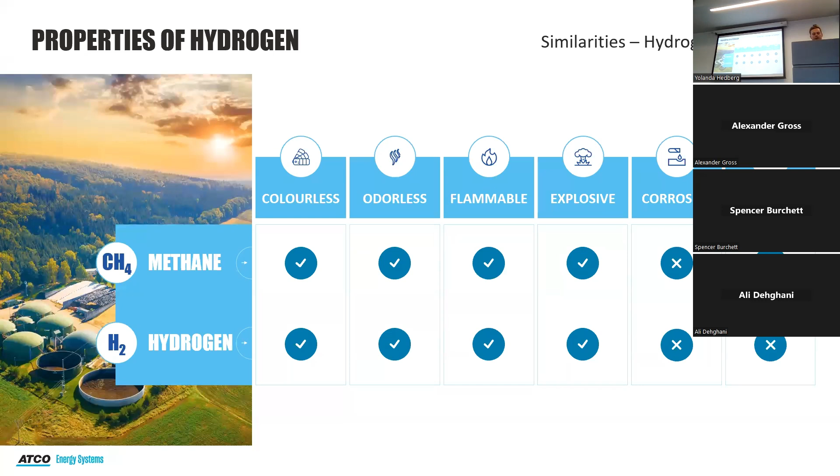So what is hydrogen? Generally speaking, I just wanted to show some comparisons between the gas we use today and hydrogen. Methane makes up about 85 to 95% of natural gas, which is what's predominantly used to heat homes in Canada. Similar to methane, hydrogen is colorless, odorless, flammable. It can be explosive, and it's non-corrosive and non-toxic. So similar in a lot of ways there.

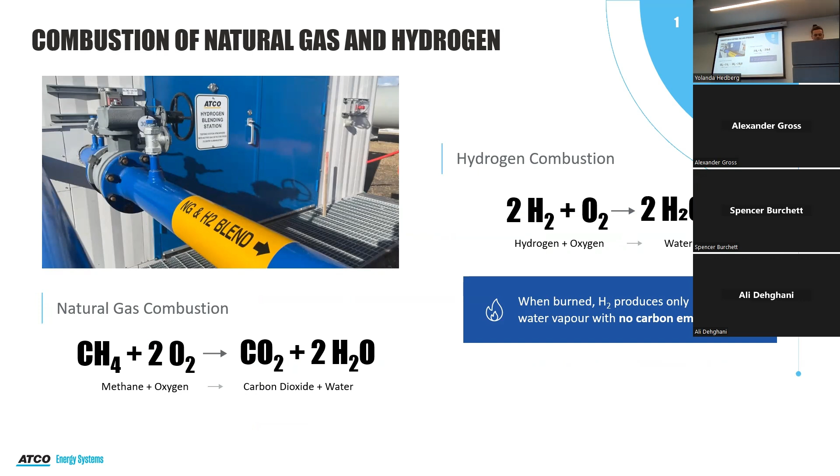In terms of combustion, this won't be anything new to you guys, but the combustion process - whenever you have a hydrocarbon, you end up with CO2 and some water vapor out the other side, along with the energy you're looking for. The benefit of hydrogen is you don't have that carbon mixed in there, so there's no CO2 as a byproduct. We're looking at carbon emissions - that's obviously the main factor when we're looking at doing hydrogen.

So water is also a big greenhouse gas, right? If the hydrogen is made from water, then that doesn't matter because it's circling. But if it's made from fossil fuels, it does matter. I guess so. I'm not sure what - it wouldn't be, I guess, any different than burning natural gas normally, right? You're still generating water. Yeah, you're still generating water. So I'm not certain to what extent, but it would be the same. You might get a little bit of larger volume because you have to burn more volume of hydrogen, but again, if you're making it from methane...

Digging into the more quantitative properties of hydrogen and comparing it to natural gas. From a density perspective, it is a lot lighter, which is a benefit in a lot of ways when we're talking about safety. It's more buoyant and diffuses a lot faster, so if you have a leak, you're less likely to have that gas build up in an area where it could be flammable.

On the other side, the flammability limits for hydrogen are a lot broader than methane. For methane, you're looking at about 5 to 15% in air where you can actually ignite a mixture; outside of that, it's either too lean or too rich. Hydrogen is a lot broader, so between 4 and 75% in air is ignitable, and your ignition energy is often a lot lower. These ignition energies shown are stoichiometric combinations, but you're about 10 times lower. For natural gas, your stoichiometric mixture is around 8 to 10%, which is a lot easier to form when you have a leak. For hydrogen, it's about 30% in air, which for most residential uses is very difficult to form in your home given the average leak tightness.

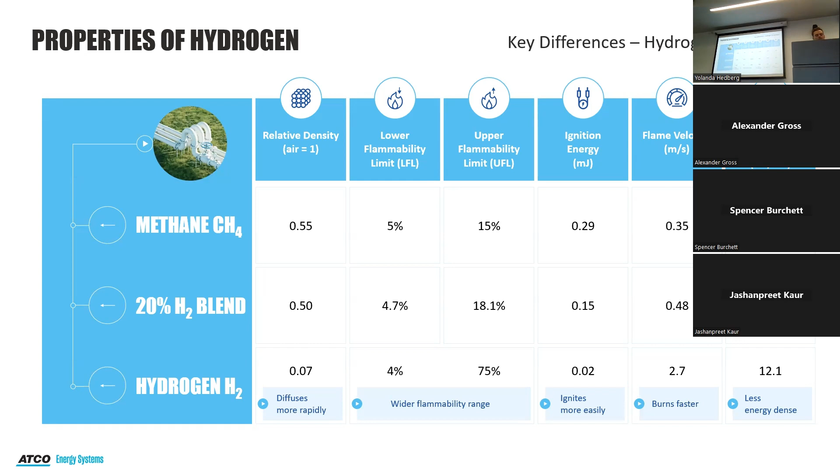Kind of like he was asking, will hydrogen be safe? We do have to consider all those different properties, but we have to treat it with respect similar to natural gas. We switched over from town gas to natural gas a number of decades ago and made adjustments to our systems to accommodate that. Similarly, we just have to understand how hydrogen reacts in our homes and what safety precautions we need to take.

One highlight is that hydrogen could be a safer gas: about 95% of the risk to your personal safety within your home, if you have a natural gas fired appliance, comes from carbon monoxide poisoning. So 95% of your chance of being injured or killed comes from CO. With hydrogen, obviously you don't have that carbon, so you can't have carbon monoxide being formed. There are some studies that show it could be safer in residential applications, given the correct safety protocols.

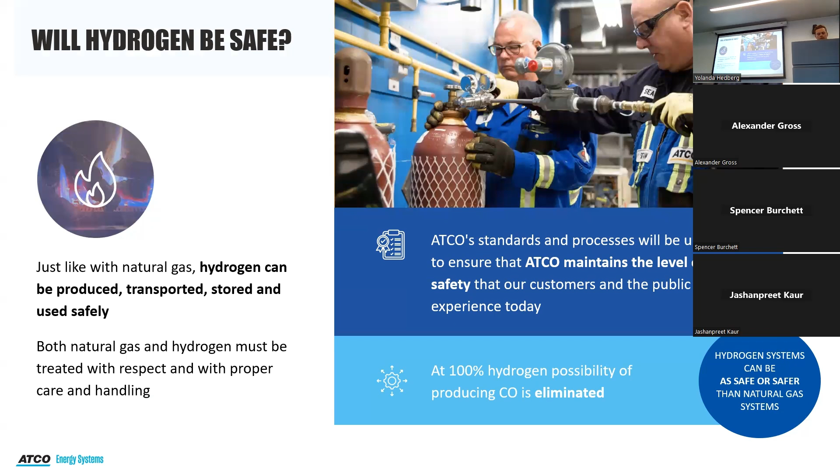So when you breathe pure hydrogen, there's nothing that happens? Yeah, there wouldn't be any toxic effect. I guess the one benefit is, like helium, it would rise out of your lungs very quickly. But obviously you probably don't want to breathe it.

It is fairly easy to ignite. You'd hear it in your voice, right? Yeah, probably. I wouldn't recommend using it as a replacement, again because it can ignite, but in terms of toxicity it's not a fun part of it.

So just talking about hydrogen production, there's three main types you might have heard about: blue hydrogen, gray hydrogen, green hydrogen. I'll talk about those, they're the main three. There's also a whole spectrum - turquoise, clear, gold - these are all different technologies. But I'll focus on the main three and then talk about why those colors are being phased out.

Blue and gray rely on similar technologies, either steam methane reforming or autothermal reforming, which operate on fairly similar principles. They take steam and natural gas, smash them together, which breaks apart bonds forming carbon dioxide and hydrogen. They insert more steam, which makes more hydrogen and carbon dioxide.

For blue hydrogen, the main principle is that once you've extracted the hydrogen from the CO2-hydrogen mixture, you're capturing that CO2 and either utilizing it in another product or storing it. For gray hydrogen, which is how about 95% of hydrogen in the world is made now, you're just shooting that CO2 into the atmosphere. In terms of carbon footprint, it's worse than burning methane because of all these processes where you have to use energy to create steam. There's pressure involved, so you're losing energy and increasing carbon.

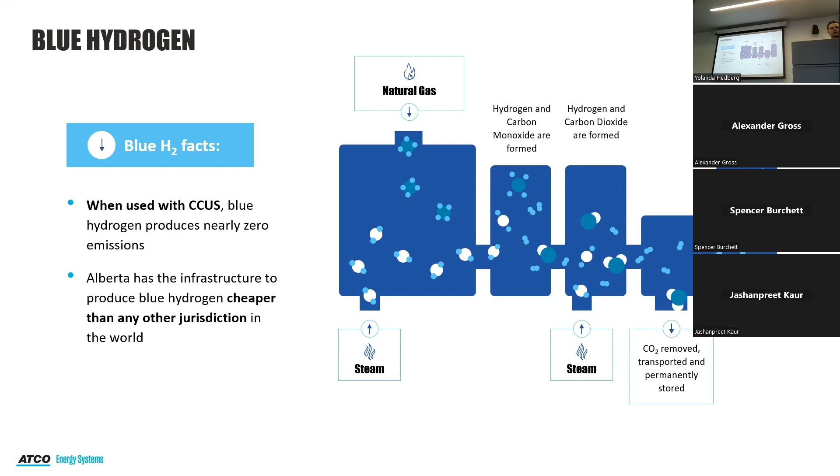Green hydrogen might be one you've heard of as well. The principle behind this is you have an electrolyzer, which is a fancy way of inserting electric charge into water and splitting apart the hydrogen and oxygen using a catalyst. The benefit is you're producing zero emissions on site, so as long as your electricity is coming from green sources like solar, wind, hydro, there's no carbon involved outside of the construction of these plants.

The downside is that they are fairly expensive. There's a lot of purification that has to go into the water as well - you can't put ionized water into most of these processes because it can damage the catalyst. It's really important to realize where the electricity is coming from, and I think that's why the color schemes are being phased out. Because you could say, I have an electrolyzer on my site, I'm producing green hydrogen, I'm good for the planet. But especially in Alberta, 60 to 80% of our electricity comes from fossil fuels, so we could say we're producing green hydrogen, but we're really not.

So what really matters when we're looking at all these different technologies is carbon intensity, because that's what we care about. Ultimately, we're not painting hydrogen molecules different colors to denote their greenness - what really matters is how much carbon is produced.

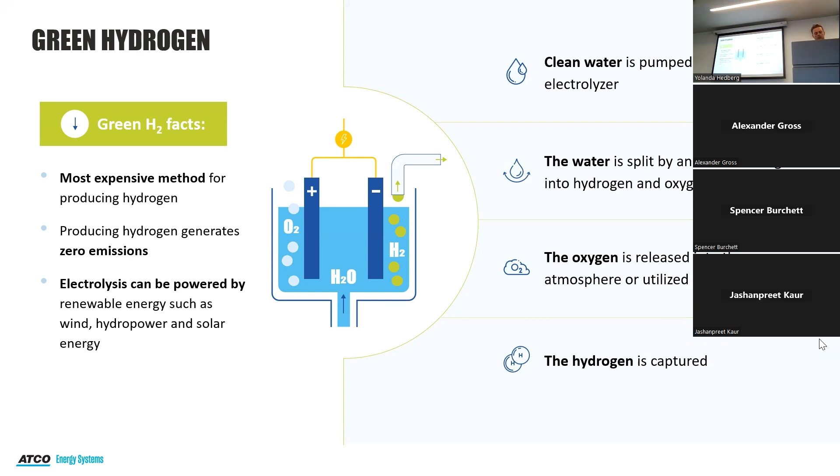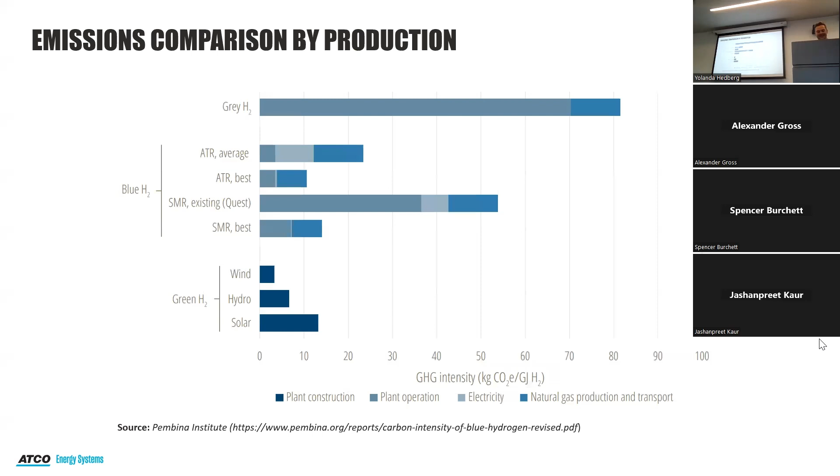Apparently there's a source here. I haven't personally read it, but it's interesting. I trust that it's somewhat right.

So the whys of hydrogen. Does anybody else have any questions before I move on? Great, let's talk about the whys of hydrogen.

Victor kind of talked about this a little bit. Obviously our federal government and the world as a whole is looking to decarbonize. On the left you can see what Canada's overall energy system looks like. If you're from BC or Ontario, your system would look a lot more favorable than this because you'll have a lot more hydro, a lot more nuclear. Alberta probably looks a lot worse than this, which I'm not proud to say. But either way, Canada as a whole has coal, gasoline, natural gas, all these things, and then a growing share of hydro, nuclear, and those sorts of clean energies.

What we see moving forward is, obviously those are very cheap forms of energy, and we're building more and more of them. But there is a need, especially in our climate, for an alternative fuel. We do have the benefit for hydrogen of using our existing pipelines - you can convert back and forth between these different forms of energy. So there's electrolyzers, turning electricity into hydrogen when you have high solar production but low electric demand, and then fuel cells to turn hydrogen back into electricity.

On the other side of things, there's always, I think, the need for biofuels. Victor was talking a little about this, where for aviation, for example, it's not really a good way to electrify a lot of these industries. Same thing with hydrogen - there's a lot of industries that are resistant to electrification but maybe favor fuels as well.

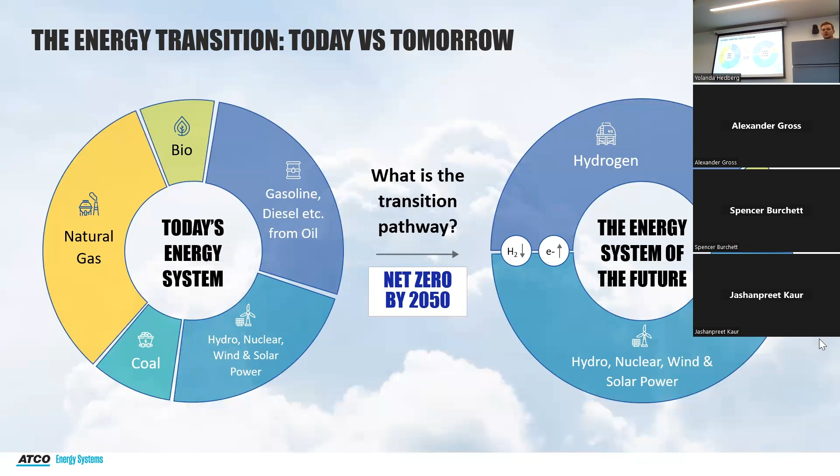As far as the gas system goes, this is sort of looking at what ATCO can focus on, because obviously we're not in heavy industry, we're not really producers of clean electricity either. We're just a transportation distribution company as far as utility goes. So there's a couple ways that we're looking at this net zero puzzle and figuring out what fits.

Part of that will be coming from end user contributions - things like the Canada Greener Homes Grant, where people are improving the efficiency of their homes. Obviously new homes are built to higher standards, you're getting more efficient appliances, heat pumps, district energy systems. There's also other continuous improvement methods - we're going to see improvements in technology, maybe our systems get more efficient. There's a role carbon credits play in that, for carbon capture in certain systems.

So we do see a large part of this coming from clean fuels. I know British Columbia does a lot of renewable natural gas, or they purchase a lot of renewable natural gas - that'll probably be a part of our system in the future as well. But we do see hydrogen being sort of the key proponent for this as we're trying to decarbonize the gas system, which is largely for heating industry.

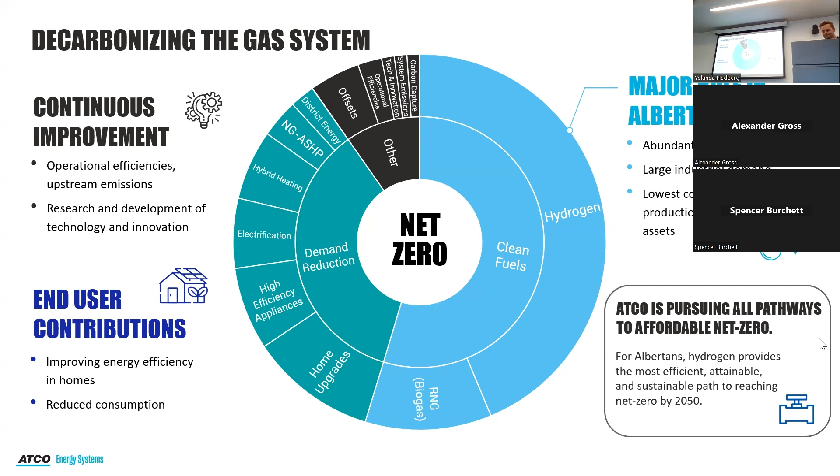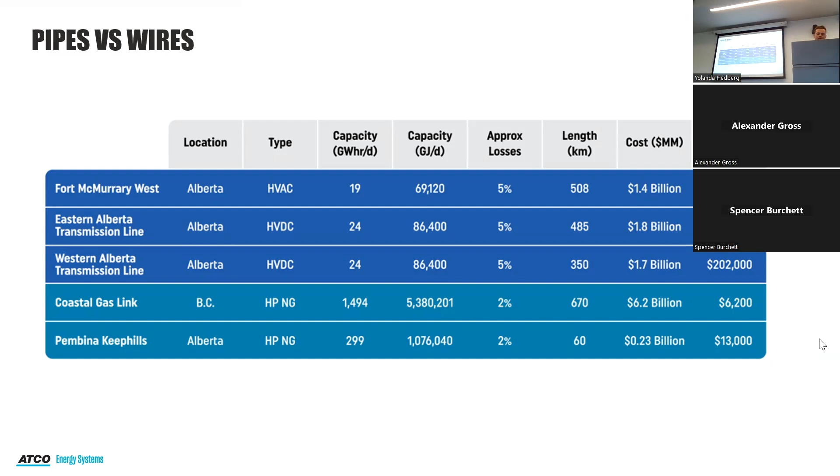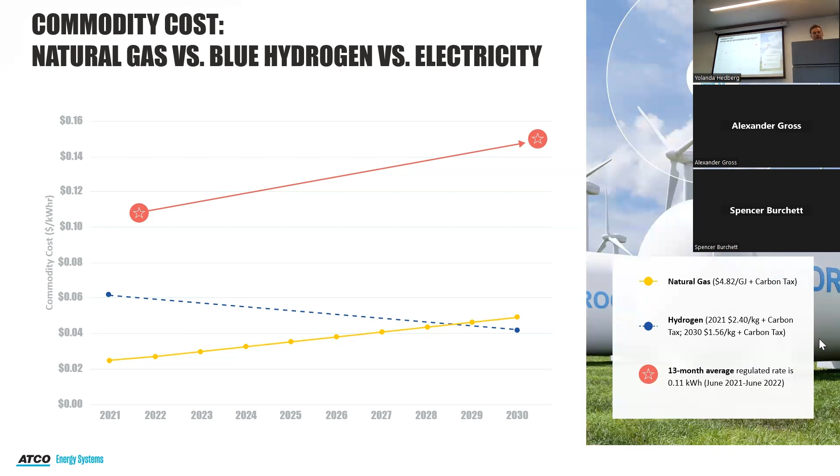We've largely supplemented the loss of coal electric production with natural gas. There has been an increase in the number of wind and solar projects. We've had some policy changes which have slowed those down in the last year. But these projections, from AESO or IPCC I believe, are showing that a lot of our growth in electric demand is expected to continue coming from natural gas. So this is showing that the pace policy has set forward for green electric projects isn't fast enough to significantly reduce the carbon intensity of the grid.

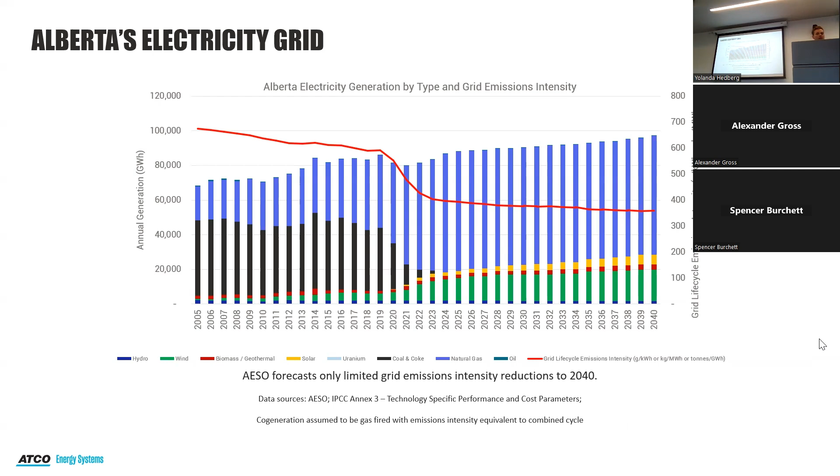So again, if we go full electric, this is going to continue being a problem in Alberta, which jurisdictionally may not matter to all of you, but it drives home the point that these hydrogen versus electrification projects really do matter to the jurisdiction.

Oh man, there's a lot of cost slides on here, I apologize. This should be the last one, I hope.

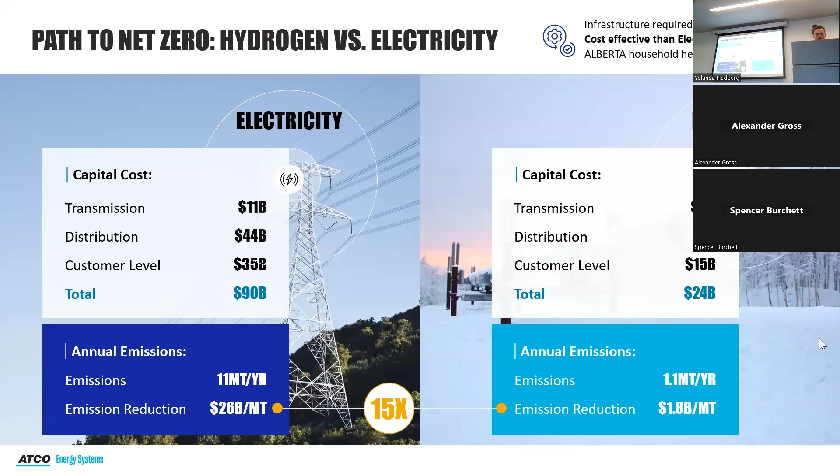I do feel that this presentation is very Alberta focused. This does have some implications for Canada, but Alberta has a huge advantage when it comes to hydrogen, which may benefit the rest of Canada as well.

We have a lot of natural gas, so we're looking at SMR and ATR as methodologies of production, able to produce that hydrogen at a very low cost. We also have carbon capture assets, large geological formations we're able to store carbon back into the ground in. We have a lot of pipeline experience, and there's a large industrial demand for this kind of stuff, which balances out the supply and demand conversation. We obviously need a place to use hydrogen if we want suppliers to come onto the grid that are low carbon.

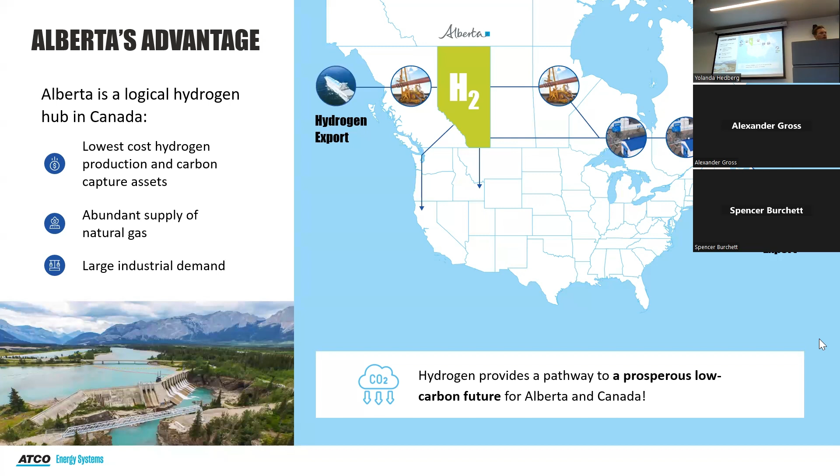So when I talked to ArcelorMittal, they said, yeah, we are looking at making steel, but we don't have the infrastructure in Canada to have the amount of hydrogen we need. So when could they switch?

Ooh, that's a good question. I think it depends. It's really policy driven. There are hydrogen pipelines in Alberta. There's a big one that runs from Fort Saskatchewan through, I think, Edmonton. I'm not sure certain of that. But it would need to be a federal policy, right? Because it's over several provinces.

Yeah, I mean, it depends. From a utility perspective, there has to be policy that changes how the utility makes money. So right now, all of ATCO's hydrogen projects are paid for by ATCO, because the way the regulated infrastructure works -- and this is probably going a little bit too deep into the boring side of the utility -- but essentially the utility is only allowed to make money on natural gas, not on hydrogen. So if we want to transport hydrogen to customers, that has to change. In terms of the generation versus transportation privately, I couldn't tell you exactly what needs to change.

I think there has to obviously be demand for it, and then somebody has to build those projects. So I know there's a bunch of projects in the works between sort of the heartlands in Alberta, close to Fort Saskatchewan, but I couldn't say for sure. Sorry, you had a question?

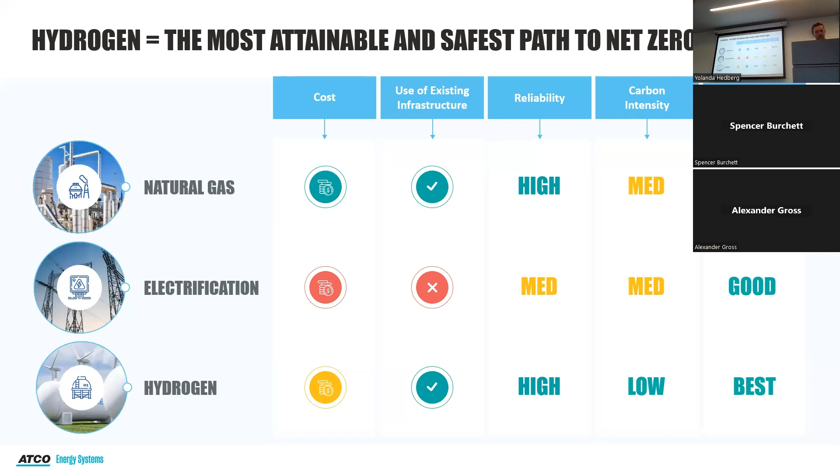We're not the only ones doing these projects. Hydrogen blended projects have existed for a number of years. Europe is very far ahead of us on this, they've been doing it for about a decade. Hawaii Gas has had about 15% hydrogen in their pipes for over 40 years, largely because they're still using town gas. So they're not injecting hydrogen, it's just in their grid, but they're using the same appliances that we use.

The key takeaway here is ATCO has a really good opportunity to leverage a lot of the learnings from these projects globally as we create the largest blending project.

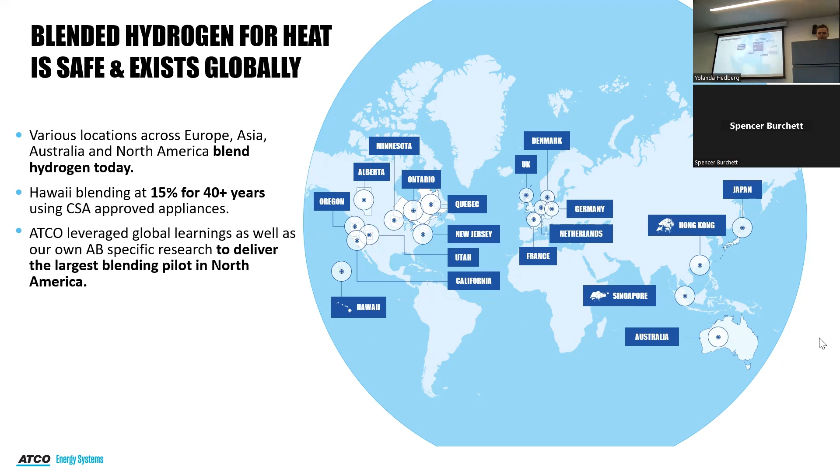We'll now dive into the Fort Saskatchewan blending project as well as some of our pure hydrogen projects and some of the work we have ongoing for the future.

How are we doing for time? Do I have till 4:15? Yes, perfect, we've got lots of time. Does anybody have questions before we move on? If not we can save them until the end, I just don't want anybody to forget their questions.

So the Fort Saskatchewan Hydrogen Blending Project, for those not familiar with the Edmonton area, Fort Saskatchewan is about 15 minutes northeast of Edmonton. It's a fairly industrial community with a lot of different oil and gas plants. Essentially what we've done is taken a section of the existing natural gas distribution grid and separated it from the rest in Fort Saskatchewan. There are about 2,100 customers on this one section of distribution grid receiving a natural gas hydrogen blend from a single source. These are mostly residential homes, some small businesses, as well as a school.

In fall of 2022, we started delivering a 5% hydrogen blend to these customers. They were the first in North America to receive a hydrogen blend to their homes, certainly in Alberta, and we plan to bring this up to 20%. The intent of this is a pilot project, so on its own it isn't saving emissions, we're using an electrolyzer but with grid electricity. What we're trying to do is demonstrate to the public, the government, and regulators that this is a viable way of reducing emissions, assuming we get the hydrogen from the correct places, and that it's safe and we can do it efficiently.

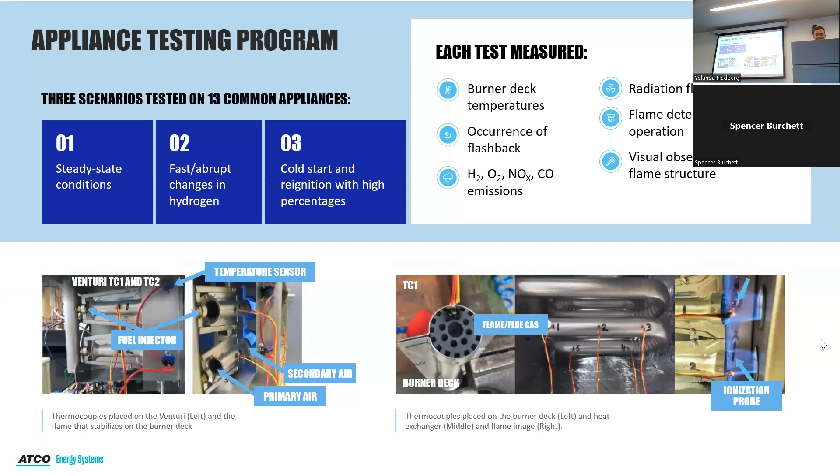So when we did this, we measured a number of different variables. Looking at emissions, is there flashback, examining the burner points, the burner deck temperature. Are you going to see a change in how long it takes to cook things? Structure of the flame. I've already talked about this when I was answering a question there, the flame detection systems - do those continue to operate? So that all kind of went into this. It was a fairly robust testing program.

And really what we found, and I kind of gave some spoilers to this earlier, is that below 20%, that 5 to 20% range that ATCO is planning on blending in, everything continues to operate fine. There's no damage to the appliances. There does have to be a little bit more long-term testing to make sure there isn't some effects that we didn't see when we did this testing, but that's work that we're still working on. I think it's possible to get up to say 25, 30% as long as we're proving out those long-term impacts.

There are some appliances that are a lot less sensitive to hydrogen, so we got some fireplaces up to 40% before we saw some of these effects.

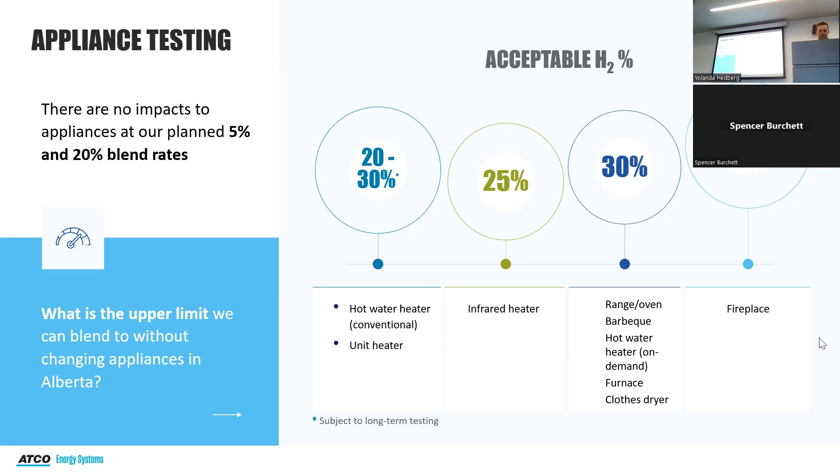What we're trying to do is insert the most amount of hydrogen we can into the grid to decarbonize as much as possible without asking customers to replace their fireplace or furnace, because at that point it becomes an issue—you may as well just go to 100%. Why not fully decarbonize? From this stemmed a joint industry project.

We're doing more work on this, and we've been lucky to get input from a number of Canadian utilities and one American utility. They're all investing in this project and testing a wider range of appliances, so we can have a more complete picture of how these different systems will be impacted, not just one area. This makes sure we're not surprised when we introduce hydrogen into the grid and someone has an obscure appliance we haven't heard of before—trying to avoid that.

As part of this project, we also did a material impact assessment. We did a full review of the materials within ATCO's system as well as our customers' systems—our distribution system and people's homes—and found they were all suitable for hydrogen and natural gas blends. Similar materials have been used for decades in other jurisdictions. That Hawaii gas project was really good learning for us, showing there hasn't been any significant impact.

We benefit a lot from the low pressures of our system. On the distribution side we typically operate at about 100 psi or around 690 kPa, and in the home it's about a quarter PSI. So you don't really see the concerns with hydrogen embrittlement that you'd see in transmission systems, where stresses are a lot higher. This has been a positive takeaway for us, but still a good exercise to make sure there are no surprises when we inject hydrogen.

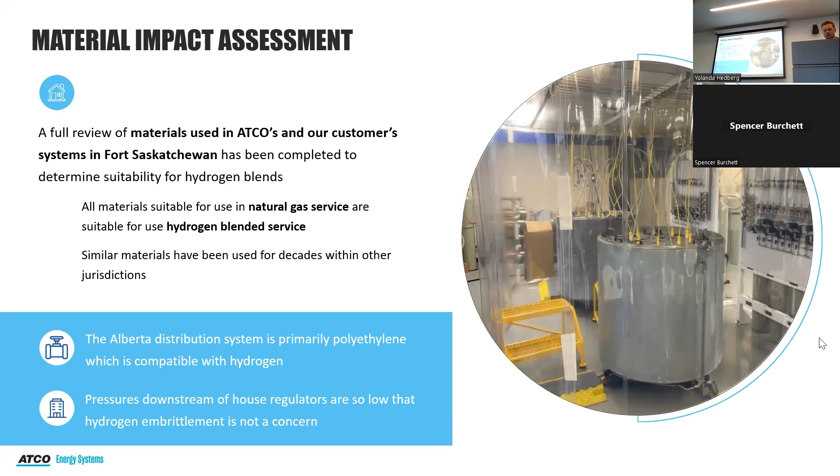On leaks: hydrogen is the smallest molecule, about 20% smaller than methane, so people assume that if a system is completely gas tight with methane, introducing hydrogen will cause leaks because of that smaller molecule. What we've found for low pressure systems, where the driving force behind leaks is much smaller, is that if the system is gas tight, it's also going to be hydrogen tight—the probability of having a leak path several angstroms smaller isn't typically enough to induce a leak. And if that leak path did exist, it would be at a rate comparable to permeation—very, very small, not a significant impact.

For higher pressure systems this may be an issue and is being investigated, but it's not a concern for hydrogen in the home. You also get the benefit of hydrogen being over 7 times lighter than natural gas, so small leaks tend to diffuse fast enough that they don't collect and form combustible mixtures. Just like natural gas, you're able to detect it—you can odorize it, though there are compatibility issues with fuel cells, so there's a lot of work being done to find an odorant compatible with all those technologies. We also have detection methods for hydrogen.

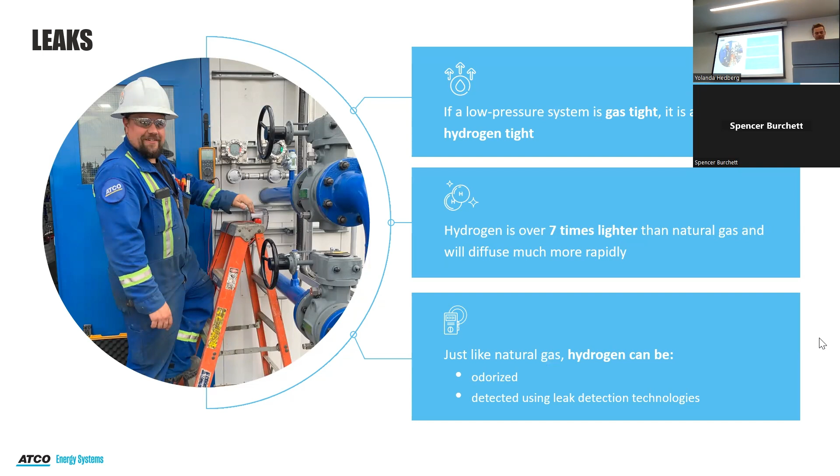Speaking of carbon monoxide, timely question—what we found is that carbon monoxide monitors actually have a cross sensitivity to hydrogen. So if you have a carbon monoxide detector in your home, you get a bit of a benefit compared to natural gas: if you're asleep and not using your nose to smell the odorant, your carbon monoxide detector might still go off.

The downside is that hydrogen is typically deleterious to these sensors. So if your carbon monoxide detector goes off, it may not go off again if there's another leak, so you do typically have to replace them when they're impacted by hydrogen. But that's something being investigated. We have personal monitors for our operators that are hydrogen hardened, so they might still go off if there's a hydrogen leak, but they don't degrade. That may be a technology we can use in the future.

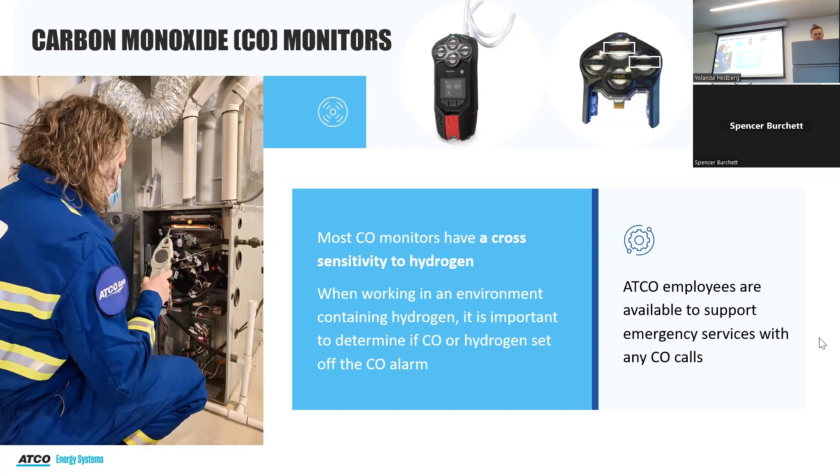General hydrogen safety summary: there's no impact to our existing natural gas appliances at 20% blends. Our odorants continue to be effective. Virtually no impact to the distribution system capacity, so we're not going to do a ton of upgrades when we go up to 20%. There are some minor upgrades required for pure hydrogen just because of that difference in energy density. We talked about leaks already. The materials are acceptable, and the total cumulative societal risk decreases between 4 to 14% with a 20% hydrogen blend, which I think is largely driven from that.

Is there really a pressure threshold where hydrogen embrittlement would not occur? Because it can even occur through corrosion, at very low pressure. Yeah, it's not really about it occurring or not occurring - it's about where it becomes relevant from an integrity perspective.

On our distribution steel pipelines, you'll still have a decrease in toughness, but because you're operating well below 30% of your SMYS, that decrease in toughness doesn't really change the materials - unless it's coupled to a corrosion process, right? Sure, because hydrogen embrittlement could be part of, for example, stress corrosion cracking, and then you have an issue. That would be the same with ours. But typically, in normal steel, it's not a problem.

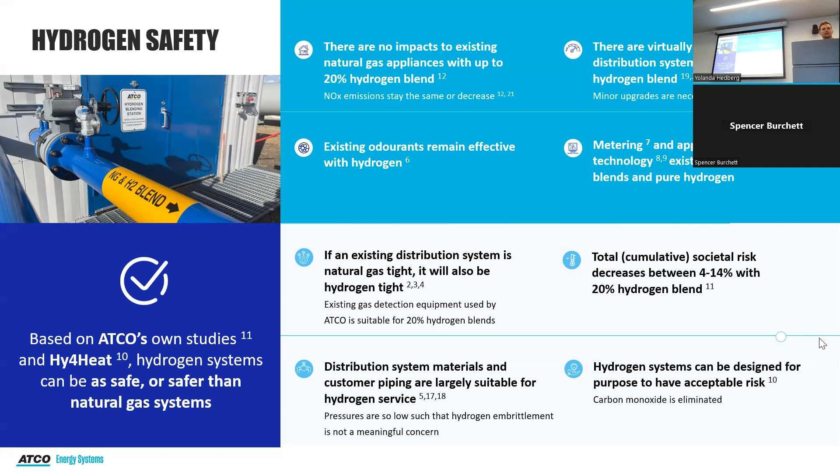Really the big thing is for transmission, where you're getting higher pressure, higher operating stresses, because they also have this high strength steel, which is bad because it's super susceptible. Whereas our distribution systems are typically low strength steel and they're operating at 5 to 10%, so they're never in a region where they're worrying about hitting that toughness threshold.

Education and engagement - one of the big pieces we did for the Fort Saskatchewan community was a hydrogen blending home inspection program. We delivered flyers to all customers in the area's homes and offered for one of our service operators to come check their appliances and pipes for leaks. But really the main point was to give customers an opportunity to ask questions. The complimentary inspection was just to incentivize them to have a conversation. We were able to get into about 85% of the homes, just over 5,800 customers.

We've also been involved in a number of industry projects, as well as developing courses for maintenance - trade schools in Calgary and Edmonton - developing hydrogen courses to educate the public.

Oh, I might have disconnected from Zoom actually. It says my internet connection is unstable. Am I still showing on there? Sorry, guys. No, you're back, I'm sharing now. Hopefully I haven't been gone for too long. Yeah, but if so, I have you still captured in the video. Well, at least they can hear me. Yeah, that's good.

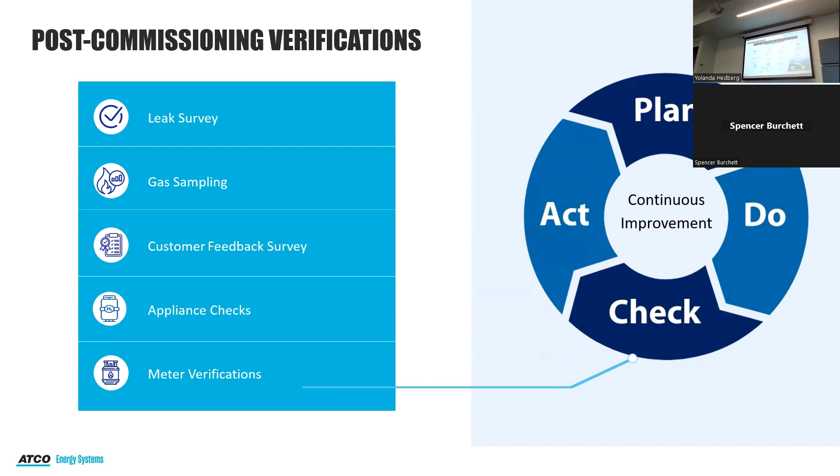Because the gases have different densities, maybe they separate in some places, right? Exactly - that was actually work we did with the University of Calgary.

This is a slide that would require you to kind of be in the weeds on a utility side, but essentially we started blending in October of 2022, blended for about a month, and then the Canadian Standards Association decided to issue a notice that said, hey, your appliances aren't good for hydrogen blends. So ATCO stopped blending, essentially to handle that problem of making sure that everybody had the right information.

We didn't want our customers reaching out and going, hey, CSA said this, you said this, what's going on? So we stopped blending and worked with the Canadian Standards Association to provide them the testing data we had. And really what they found eventually is that the test gases they already have for natural gas cover up to 5% hydrogen.

So that ended up not being a problem. The issue moving forward is getting up to 20%. So we do want to make sure we're on the same page with CSA moving forward. Funny enough, we worked with the standards group in CSA, and we're pretty open communications-wise with them when we were working on this project, and just sort of assumed that would feed through the company. And what we found was that the verification and certification group had no idea what we were doing, so this was a surprise to them.

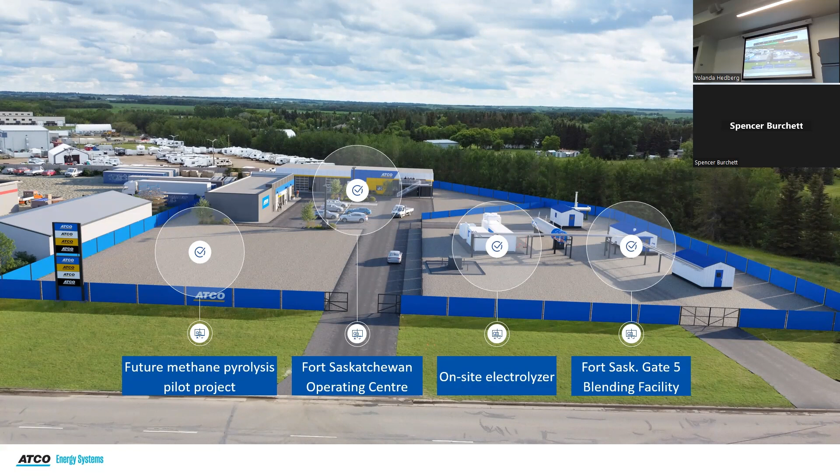This is the operations center. So half the building serves as sort of a home for our service operators who work out of the area and are installing meters, checking on homes. The other half is a demonstration space.

So this building is hooked up to not only natural gas, but also the hydrogen natural gas blend that comes from our station, as well as pure hydrogen. So we have 8 test or demonstration bays here, where we're looking to demonstrate new appliances as they come out. So if there's a new hydrogen furnace, we can demonstrate it to the public here. If there's a barbecue or something like that, we can demonstrate this to the public and government in this space.

And this building is actually heated 100% by hydrogen, as well as hot water from that. And that comes from this guy, which is a boiler hot water unit. So it creates either hot air and water or just hot water for space heating. So those are 2 different units. This was created by Gradient Thermal out of Calgary. ATCO worked with them to design that. And D&D out of the Netherlands was also part of the program.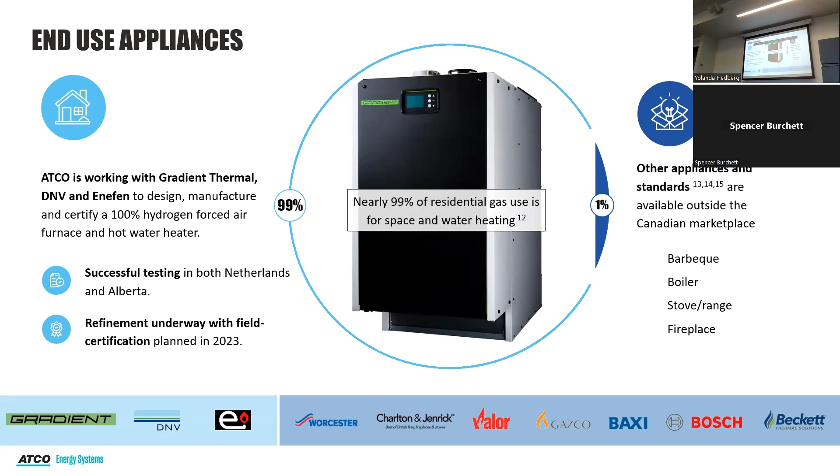So I guess just an example of an appliance. I think the next slide also has a number of other examples. So just to kind of prove out that these things do exist. Largely they exist in Europe at this point. They're so much further ahead in terms of certifying all these things. So that furnace that I showed in the last slide, we had to get special approvals to use in our facility because there's no certification standard currently for pure hydrogen appliances. So we're approved to use it, but we couldn't just install it everywhere. We couldn't buy it off the shelf and install it in your home yet. But these things do exist in Europe.

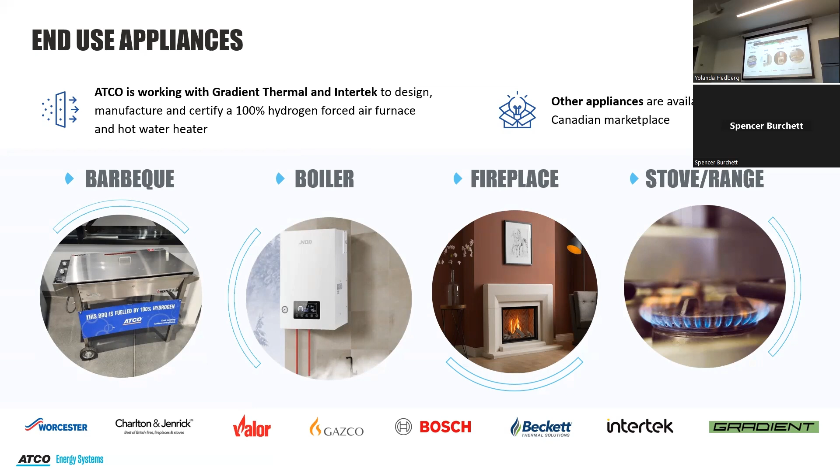There's stoves, fireplaces, barbecues. We have one out, and we've cooked off of, which is kind of fun. But yeah, these things are becoming more and more prevalent. So it won't just be a switch over for just your furnace. Maybe we'll be able to continue to cook on hydrogen or on gas.

And then moving on, we'll be doing our engineering and design stage for the community. We'll be designing a whole community's worth of these houses. We're starting to build homes in late 2025, early 2026. The first stage will be about 150 homes, but the ultimate goal of this community will be about 85,000 residents. So close to 20 to 25,000 that could be running hydrogen. So if nothing else happens in the world, if everywhere else stands still, this will be the biggest hydrogen project in the world. But I wouldn't...

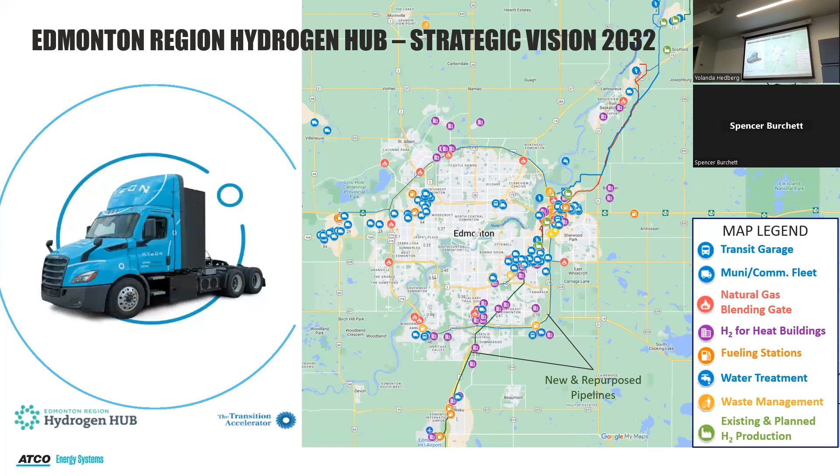That truck exists—yeah, we've driven them around. I'm from Edmonton, and I heard there's a bus or truck that runs on a hydrogen fuel cell. Yeah, I think there's hydrogen buses as well, though I'm not sure if they're already in use. I don't think they're in use yet—I think they're still looking for a refueling station. Strathcona County is planning on having some hydrogen buses. As far as I know, right now in Canada there's not even one hydrogen bus or car being used, so I guess this is still developing. Yeah, there's a lot of work to do on the infrastructure side, especially for passenger vehicles—where do you fill them, what do they cost—but they are coming for sure. The technology to run the buses definitely exists; it's more like where do you refuel them. Great question.

What's next? For us, we've done the pilot project. We're still working on spreading the word about why this is a good option for Canadians, and then it really comes down to changes in regulations. Really, just pushing that this is a safe alternative—abundant, a low carbon hydrogen supply or energy supply. It's reliable, it will be cost effective, and again, lower emissions than what we currently have.